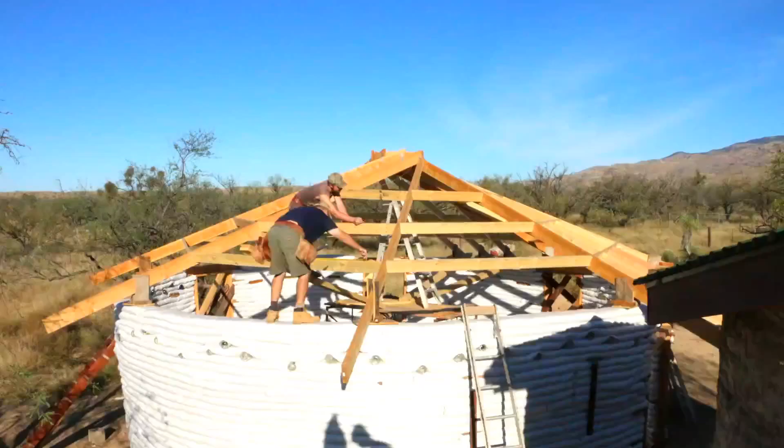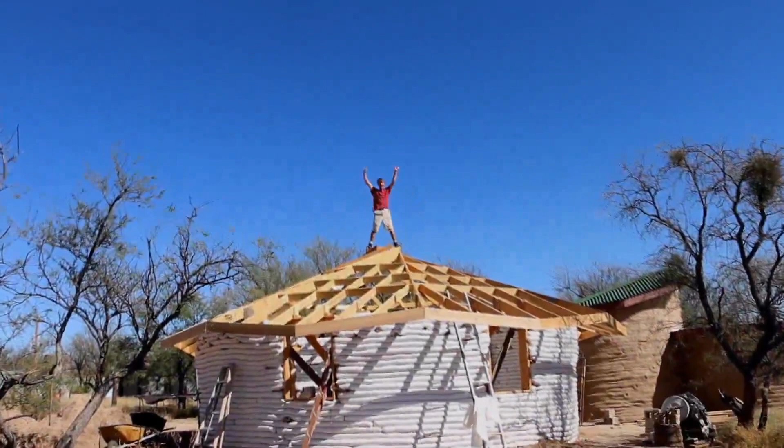We were really fast when we built this. Oh yes. It was lightning speed. It was flash. There it is, all filled in. Well, not quite all, but almost all filled in. And that's Bryson up there waiting for the aliens to reach down and grab him and take him into the sky. Wow, fancy. Okay, but I'm winging it here, guys.

But you can see that it was a great project. It was a lot of fun. There's really an aerial view. Probably one of the last ones we ever got. Until once again, soon. Drum roll. Soon we'll have another one. So pretty excited about this. You guys may remember too, we put a couple videos out on it. I think there's 3 total, including the decking and the roofing and all the other stuff we put on it.

So yeah, we're missing Shay tonight. She's not participating. Roofs aren't really her thing, you know. I think she's putting makeup on. She likes to raise the roof, but she doesn't like to build it. That's good. Raise the roof. Yeah.

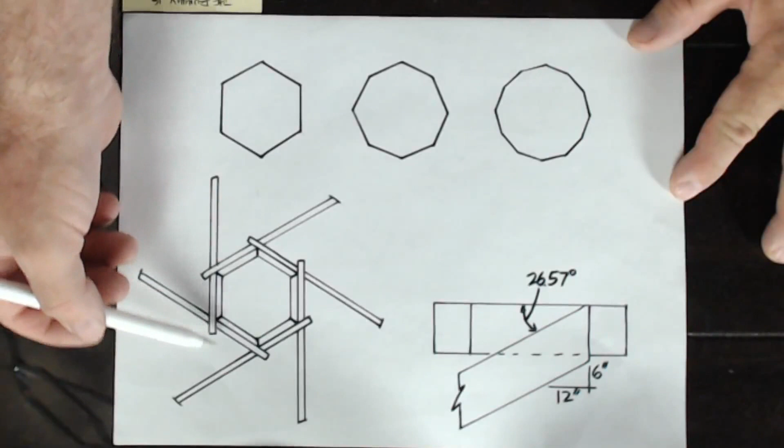Here's an example of what we might do. Here's the top view looking down. This will be the compression ring that we build. And remember that we stack these things one on top of another in consecutive order. So let's pretend this is our first one. It goes up, and then it nails to the side of the compression ring. And then we put the next one on top of it, which is over here.

It's easier, too, when you're actually up there doing it... See how you got a straight one here and a straight one there? It's easier to build this one and then this one, because then that'll hold the ring up in the air while you're trying to stack the other ones on. You got to pick it up and move it, pick it up and move it. But if you try and stack around, it becomes a lot more weight to move.

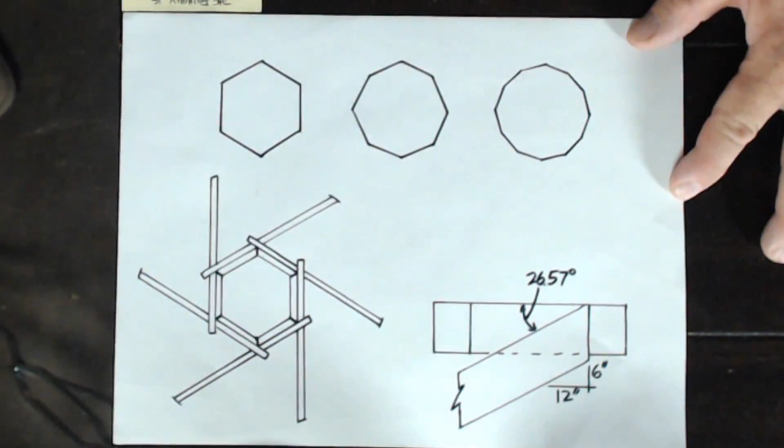I think, too, a lot of times what they'll do with the pole idea is they'll put a post underneath there. It has some other fancy name too, some other guy came up with. But for the most part, you post up that first one, and after you get that in the air, you can build on the rest of it. And after you get everything stacked, you just take the post out, and everything will settle.

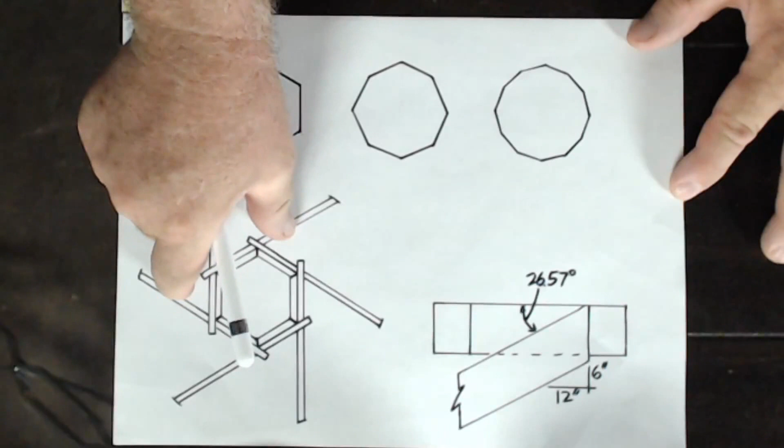But anyway, the idea is that this spot and this spot on our drawing is what holds the weight for this portion of it, and then that just compounds all the way around. Pretty soon you have equal pressure on all points. And that's kind of the deal.

And then you have to make some decisions on what to do with the pitch, because the more of these rafters or poles that you put on, the larger that circle gets. So you have to make some decisions on how big you want that. I planned for a 2-foot opening on the octagon shape here. On this one, we'll probably go with something similar, a 2-foot opening, or we may go with this design, which is still going to be 2 feet.

And if I design this out right, we should be able to get all 12 of them to fit on the same way this does. It's just we're going to have more of these coming out. There'll be one at each one of the additional spots.

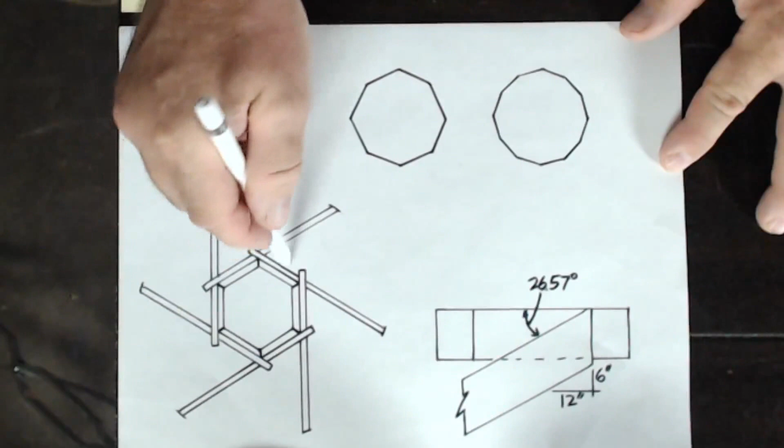Over here is this whole idea of degrees and pitches. If I wanted a 6/12 pitch, which is a more common pitch that I recognize as a framer, you have that in degrees also, 26.57, which is another important thing because that's going to relate to how we do the poles.

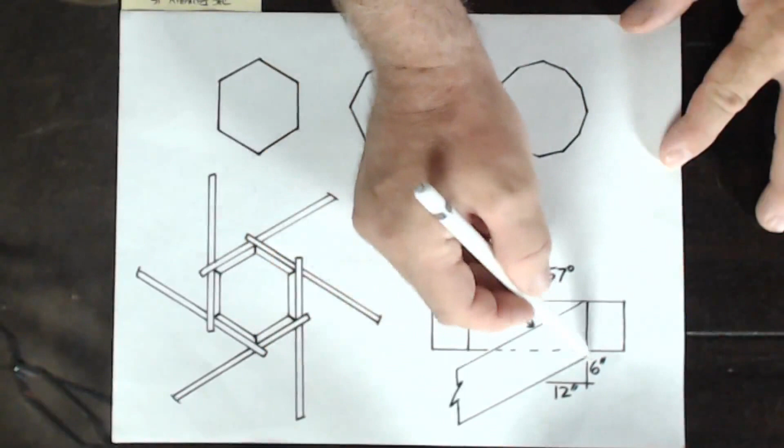So, for instance, this is a side view of our doohickey, the octagon, or whatever, the compression ring. Thanks. Of the compression ring, and then this is just one of the rafters that goes up and attaches to it. There will be a notch placed in either the top or the bottom as a bird's mouth, but I think the top is a better spot for the next one that comes in and rests on this also.

Okay, so Steve Consell also says, so the weight pushing down doesn't try to push the walls out on the top plate? No, it doesn't. It all becomes even. And why is that? Well, it has to do, let's go back over here, with pressures. It has to equal.

Gravity. Woo! A plus. Sorry. Go ahead. School for the lesson today. Okay, I hope you have your thinking caps on because we're doing this.

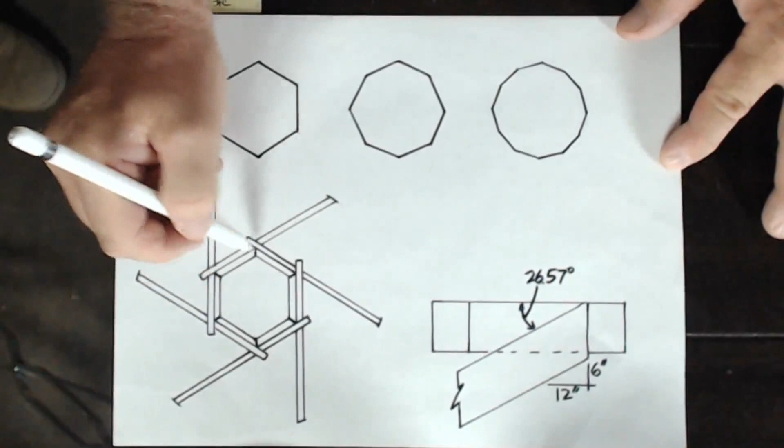Pressure on each one of these points is equal. So gravity is pulling the same down on this one as it would be pulling on this one, which is pulling on this one, this one, this one, and this one. But it's also holding up that one, holding up that one. It holds up and pulls down in the same way. So one's pushing up, one's pulling down. So it's doing this. If you transfer that all the way around, what happens?

They couldn't see you. Why? Okay, I got it. Oh, sorry.

If you have one pushing up and one pulling down at the same time, it's like this wedge idea. So you have something wedged in there. It's not going to go anywhere because it's wedged at this shape, at this pitch. And then you do this times however many you have around in a circle, and it won't expand. Pretty soon it stops expanding. It does in the beginning a little bit, and we thought it was going to expand a whole lot more than it did.

And we ran a cable all the way around it, and it was unnecessary. I think probably just for peace of mind, we may end up doing something again, just because it's hard to get over the fact that it's not going to do it. But I don't think it would. Once it settles and locks in, it physically can't go down anymore. So it's another compression ring that happens at the walls too.

Hello. We're good. Okay. Oh, we're having fun now, aren't we? Go ahead. Okay.

At the circle, you're also seeing a compression ring there too. It's also a circle that those sit on. So, all right, one more quickie. If you're doing poles, which you'll see on the internet a lot, you'll see a lot of different poles. There's something called the rummy.

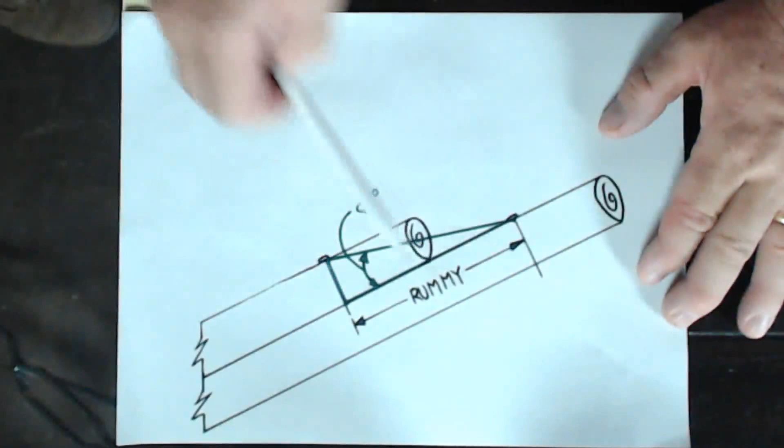Now, that means that you drink more rum while you're putting it up. It actually comes together better. Isn't that a card game? That's a rummy. We should sing that song. Alcohol. Sorry, anyway, go ahead. So it's a card game.

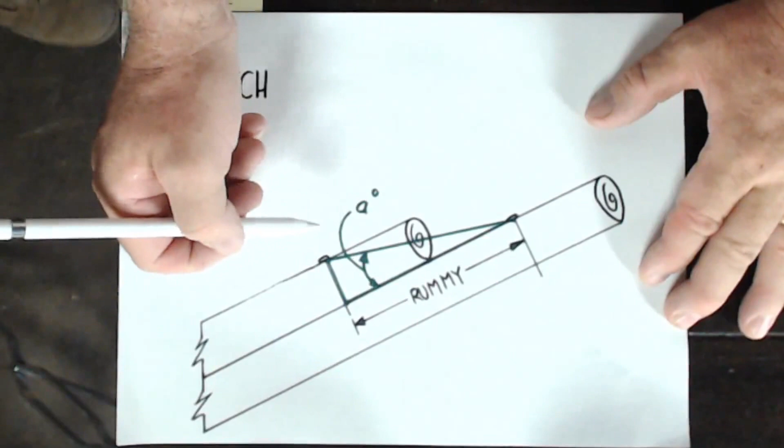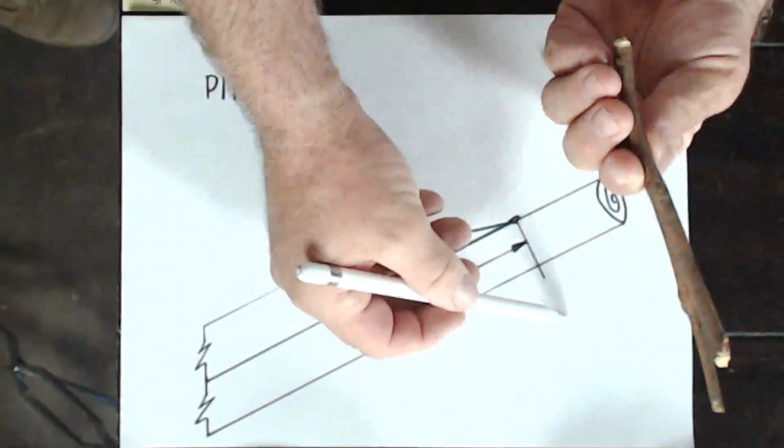No, actually, the rummy is a term that's used to build a triangle. And here's how it works. This is the pin that goes into this pole. So if we have two of these, we're going to take two sticks, and we see that there's this, right? And then we straighten it out on these nice, beautiful sticks. Very straight. If this is pinned into here, and this is pinned into the next one, okay? This is pinned into this one, and then there'll be another one later that comes on top of this one.

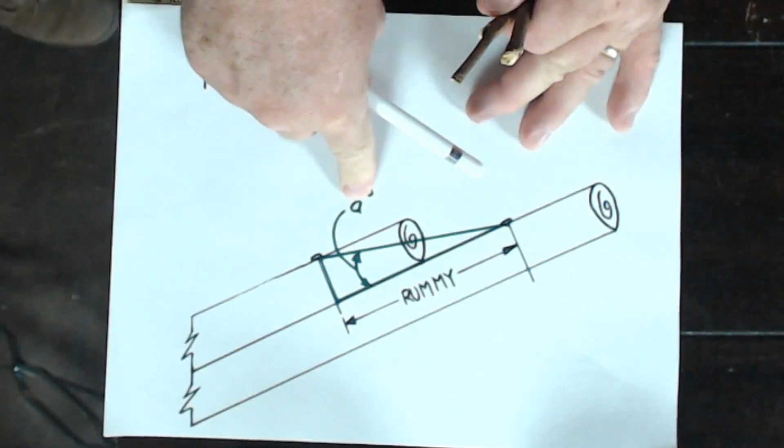If we just take the two pins that are closest to each other, as they would be in a horizontal plane, and then we draw this triangle from this distance from here to here, the width of this determines the height of the triangle. Here, it gives us an alpha. It gives us an unknown. It's a degree, an angle. So in this case, you have to kind of do pitch and angle at the same time.

So if you have, for instance, a 6/12 pitch, you have about a 26.5 degree angle. Now you can always go online and get one of the calculators to figure that out.

Okay, wow, that was a science lesson. Way too much for me.

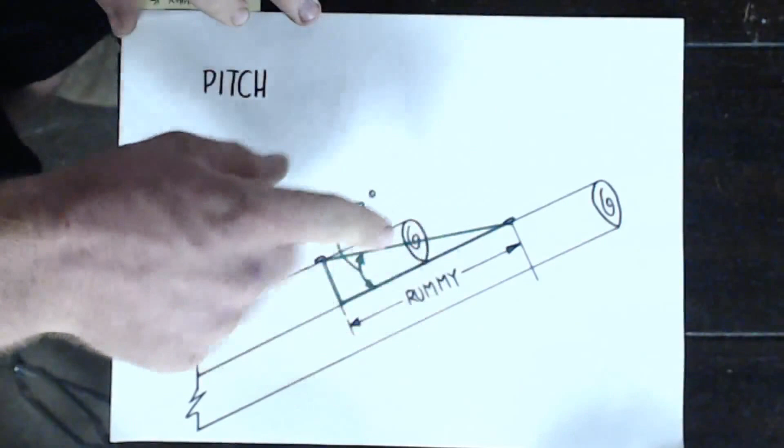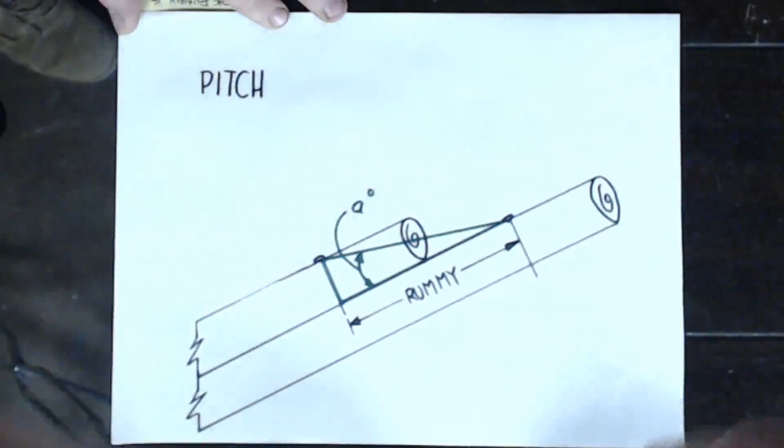Yeah, and this actually makes a lot of sense when you think about the compression ring, which doesn't exist in the log, right? They don't use the ring in the center. No, it builds its own. But it makes sense. Let's say that you wanted your compression ring to set level on there, which you typically would, and that's why this is the distance here, right? Because then that makes them set all even, so they're all sitting at the same exact level as they go around. Yep, and the same distance. This is the same distance.

And remember that a circle is a series of lines, and as you make your connections the same all the way around, it just creates a nice little circle. Like I say, 13 is about average. There are some mathematics that you can use if you want to determine your pitch and your rummy and all the rest of that stuff online too, so you guys can look that up.

So my question is, why is it 13? It's an odd number. The more you put on it, the bigger the circle gets. So let's say you had 20, you keep adding those on, all of a sudden your circle's this big. Okay, that's using a pole method. But if you use about 13, that gives you a pretty average diameter. So it wouldn't have to be an even number like when you're building most other roofs. No. So it doesn't matter the number.

And I cheat the system by building my own compression ring because I use these here, which is upside down. We can cheat the system by using flat material as opposed to poles and just attaching it to a compression ring. And I think this system makes the build process really easy because it's something else to hold the rafter in place when you're building it.

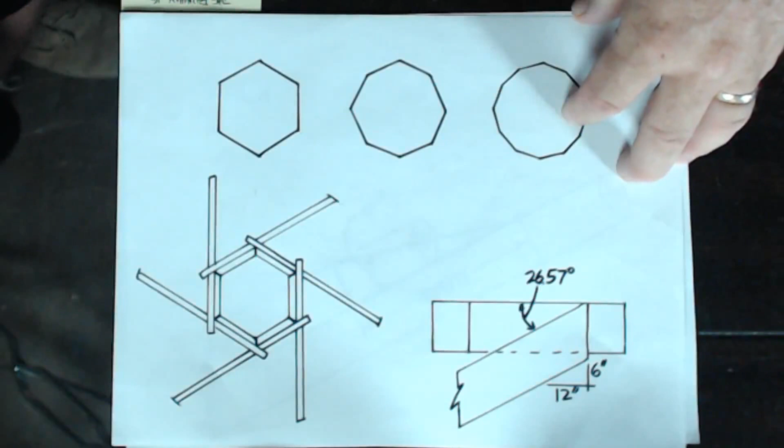Yeah. If you were trying to build the pole one, it's kind of hard to get them all in place. And then once they're in place, they're good. But to get them there, I think it's probably a bit of a trick. We found that when we were building our little test one, and we didn't have the compression ring in the center. Anyway, this seems to work out pretty good.

There is the pole method, and that's the most commonly used when you're out and away and you have poles and stuff. I love to work with flat material because I can math that out. It's just a series of squares and triangles for me. Well, this would make sense too. If you're building a cabin and you had a lot of just little trees, you could build yourself a little roof out of it.

Someone asked about the roof for the cabin. This would be a good one. There's a lot on the property. There's a lot of scrub oak poles that are really straight that we could easily probably do this with, and that might be fun. I would like to do it. Yeah, for a domed roof.

What about with snow and stuff? How would that handle it? Someone's asking that same question. Well, the compression ring works as good as any circle works, because the pressure is equal on all parts of a compression ring. So as long as it's secure in each one of these places that we have on our circle, it's all secure. It's not going anywhere. They build these things anywhere in the world. So I wouldn't worry about it.

I put a caveat in there: anywhere in the world doesn't mean we go to Antarctica and try to build one. But I mean the snow that we would typically see in the United States in the lower 48 that we have, I don't know.